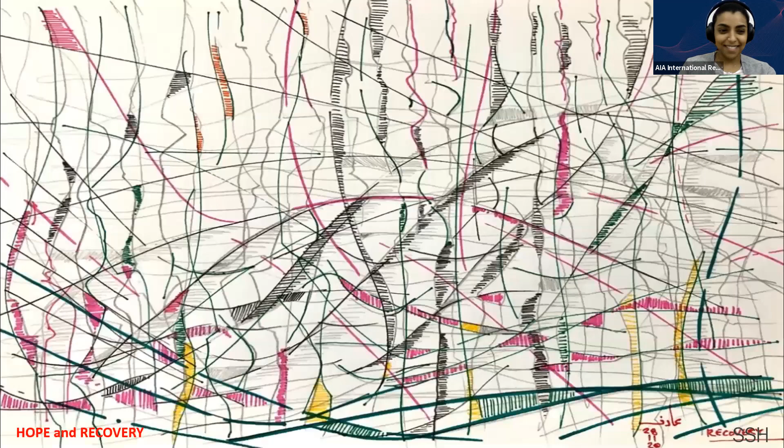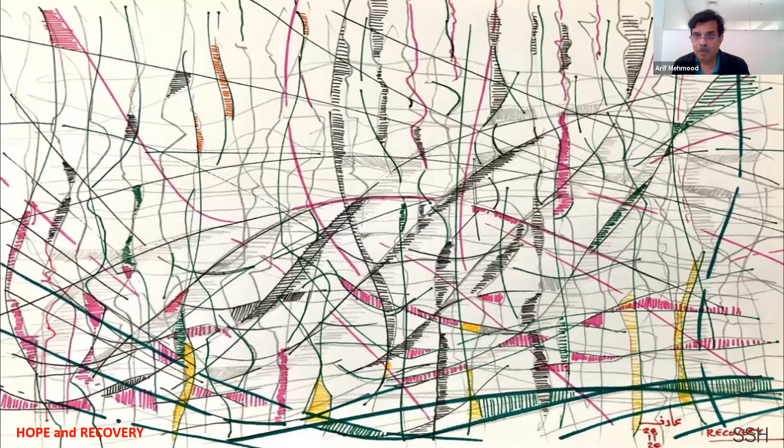It is very difficult to be able to spend time in the evening away from your families, and of course in this pandemic that we're in, there are all sorts of emotions that we're having to deal with. Just for a few words on this picture in front of you - this was done late November. As expatriates, as you know, we live very unusual lives, spread across different parts of the world. Work is one place, family another, and friends somewhere else. So this diagram was at the end of a fairly difficult period back in the UK when the pandemic was at its highest, and thankfully, around about the November time, the figures began to improve.

There was hope and recovery, so there's an element of jubilation and color in this diagram, but still a lot of dark lines everywhere. But that's the life we live as expatriates.

And to some extent, it's a responsibility we must carry because somebody has to stitch the world to keep it global. So this talk today is about how ideas get carried globally. AIA is a fantastic vehicle for that, as is the RIBA. And along with our colleagues in the aviation industry, the education sector, and the construction sector, these are the elements that help us to stitch the world together across different countries and nations, etc. So those are the few words about this diagram.

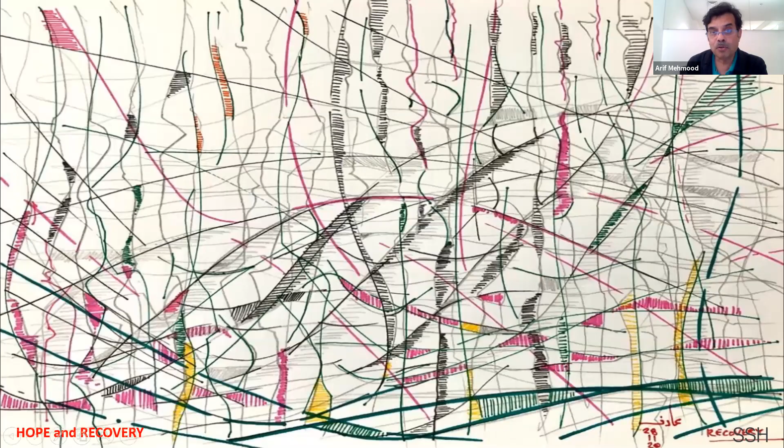And the talk was about the collaboration of all that you need to have in order to perform architecture. And without engineering, you cannot really do architecture, because some of the more technical issues need to be solved by specialists, and engineers are by nature specialists. So it's about collaboration. And when I chose the title, 40 years seemed quite reasonable, where some of the big changes were happening.

And I felt that perhaps the articulation of structure, the ideas to do with sustainability and environmental engineering and fire engineering, these were impacting the way we were designing as architects. So I thought perhaps we go back about 40 years and pick up these threads and see how they influence the architecture that we produced.

And when this was happening in my own mind, trying to put together this talk, I realized that my own career is about the same period, 40 years. So in some ways, a lot of the work I'm putting forward today is a timeline of my own projects, and the collaborations I've had with some fantastic people along the line, and some of the issues we have to solve, which I'm hoping will be of interest to some of the younger people today. And I'm hoping there will be somebody in there who is my peer group, so the talk won't be too irrelevant in that respect.

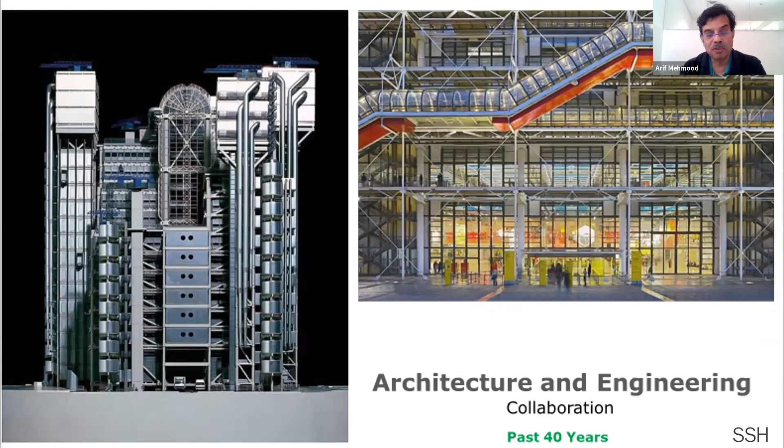So today, what I thought I'd do is pick up on 5 themes that I will take through some of the projects that began in my early career to where I am right now. You will see from the diagrams that I showed earlier there is an incredible amount of expression of the structure. Our structural engineering profession was moving towards grasping what it needs to do, and in fact turning into kind of sculpture. You can see the full control of the engineering of structure. Together with that, the service engineering was also being developed, and it's almost becoming quite poetic in some of the early projects, and we'll be looking at that as well.

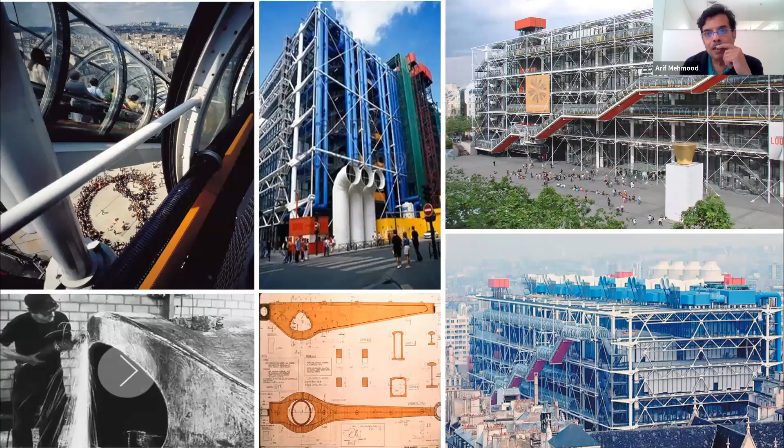So moving forward, this project is a good way of sharing with all of the discipline leads that we now have to deal with: the structure, MEP, facade engineering - all of those issues are prevalent in this one project. And if you look at the back of it, you can see that it is truly a collaborative solution where the mechanical engineering, the structural engineering, and the architecture is supporting each other to come to a solution. A failure in any one of those would be a failure for the entire project.

And I think this is a point where we know that we have to design as equals. We cannot go back, as it were, 20 years before this, where the architect would do a plan and the structure would then drop in his structure, and the mechanical electrical engineer would then drop his engineering within that, and the builder would simply build it.

This is a truly collaborative process, and the process of deciding - well, okay, let's allocate one facade for the entire engineering facade, which went to the back. The front of the facade had the movement of the circulation of the people. It also became a square which represented the movement.

The picture to the top left is a picture that won the award for the photographic picture of the year. It was actually taken by an architect or an architectural photographer. It represents a very popular square in Paris, and you can see the formation of the circular pattern. The performers are performing, the public is watching the performers, and the building is watching the performance itself. It's a beautiful picture that won the prize.

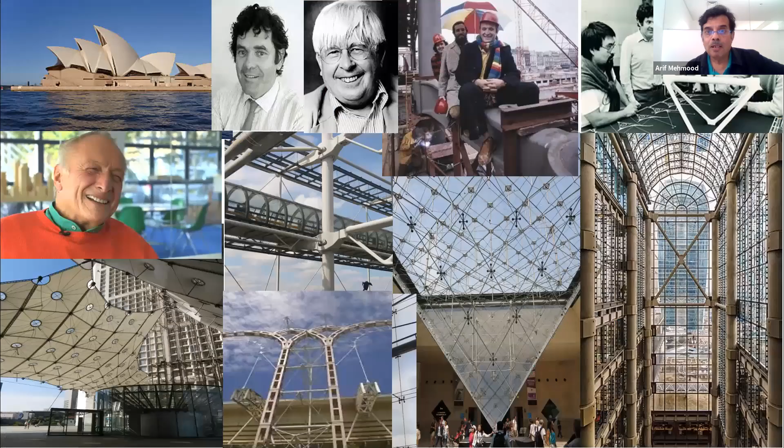And this was designed by Peter Rice, and I think Ted Happold was also involved. So these were some of the most important engineers in British history. The next slide is showing you all these fantastic people who were generating these projects, who were taking my generation of architects to a new level. We were dreaming these projects, looking at the works of these people.

You've got Jørn Utzon's Sydney Opera House. Next to that is Peter Rice, who was the site engineer for the same project. He went on to do the engineering for the Pompidou Center. Ted Happold, who was also in the Pompidou Center, went on to establish Buro Happold, which we've been working with for several projects, and still continue to work with them here in Dubai. And that lovely picture with Richard and his team sitting on the structure of the Pompidou Center. To the right, Renzo Piano was his collaborator for the Pompidou Center.

So these images are just collaged together, where the glass industry was moving to a new level. The structural engineering was moving to a new level.

Bottom from the second to the left is an archway designed by Peter Rice for a project in Spain, which utilizes machined granite with stainless steel tubes to hold it together. It was a fun time for engineering in those early 80s.

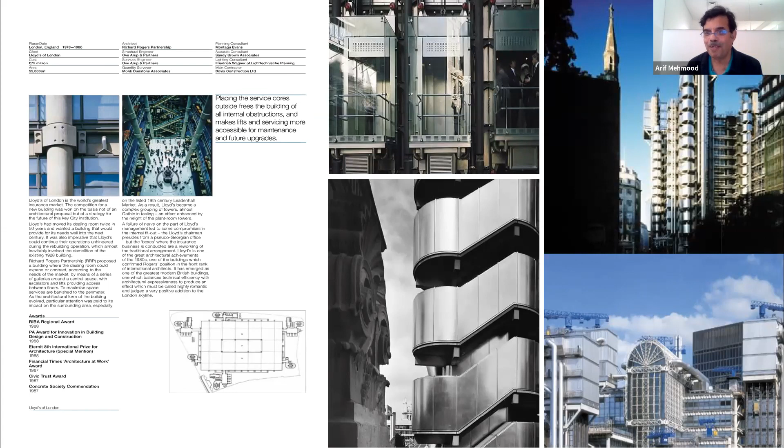At the last leg of this particular project, Tadao Ando was visiting England at the time and wanted to see Lloyd's of London. I happened to take him around this building, spent a day with him just showing him around the project. He couldn't speak a word of English, and to be honest, it didn't really make any difference - the building kind of spoke for itself. He left an open invitation for me to come and see him in Tokyo, and he'd give me a day back, but I haven't actually managed to get to Tokyo yet. Inshallah, one day I will do that.

Just wanted to show you this beautiful painting. It's by an artist called Ben Johnson. The reason I'm showing this is that this is another wonderful project by Richard Rogers, Inmos. It was for the microchip factory. A microchip in those days was a big thing, and factories had to be very, very special.

This building has a structure where the roof doesn't touch the floor. Vibrations weren't allowed in order to be able to make the microchip - the building had to be vibration proof, and there was the issue that if airplanes were flying over this building, the vibration would impact the fabrication of the microchip. So this building is a very special piece of engineering in its own right, but more importantly, this work by Ben Johnson glorified what the architecture was doing and the collaboration with the engineering. This is a photorealistic painting of the architecture and the engineering that goes to make the architecture, and Ben Johnson was doing these wonderful paintings.

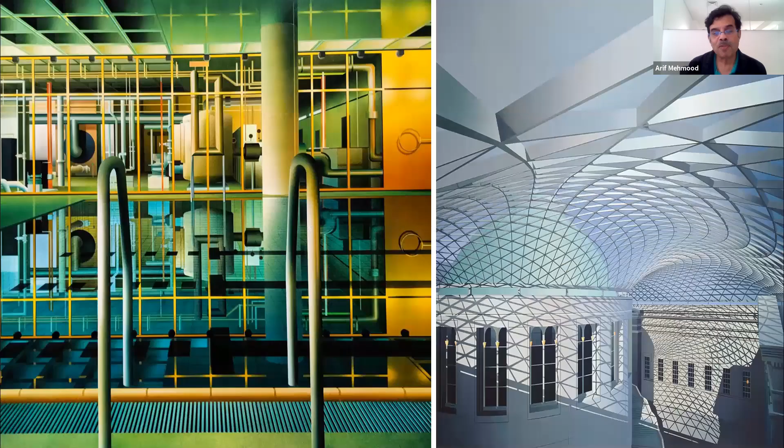On the left is Willis Faber. He is actually drawing the swimming pool and the plant that services that pool and the rest of the building. The picture on your right is the wonderful British Museum extension by Norman Foster, and again Ben Johnson is doing his magic in doing the painting of photorealistic architecture.

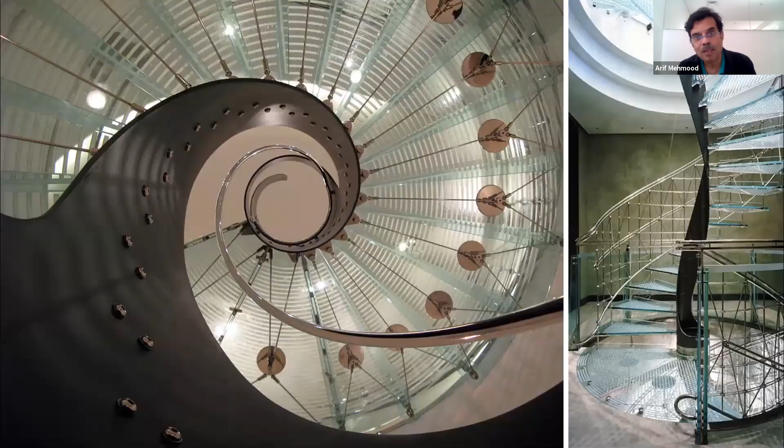Just moving on, at the time Lloyds was being done, Eva Jiricna was becoming quite prominent as an architect. She started her career with Richard Rogers and went on to develop her own career, and she became the queen of staircases. This is just an absolute piece of magic of a staircase, where the glass technology is brought to the forefront, and the structural engineers are getting involved in trying to understand what's happening to the glass, how the forces can be resisted, how the metals and the balustrades and all these little machined components hold together these little bits of cage, if you like.

It's just another refinement that's happening in the industry. And as a young architect, it's becoming a beautiful time to work in. You'd want to get up in the morning and say to the client, 'Oh, let's have another one of these staircases.' And we were doing this. It was absolutely fascinating.

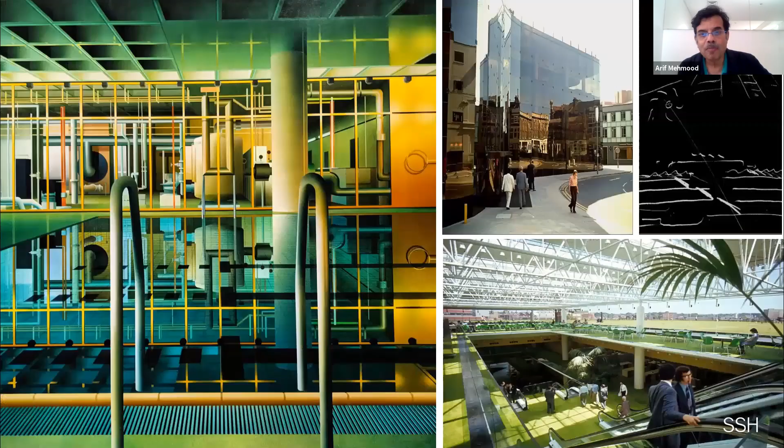So this is just before I am actually becoming an architect who has to start engaging with the real world and doing real work, and this was the template of work just before me. Again, Ben Johnson doing the painting of the building we're just looking at, the little sketch of Norman Foster showing how he sees the mobility of people through the building, and the picture at the bottom actually showing the sketch next to the reality of what actually happened. It's an absolutely wonderful project.

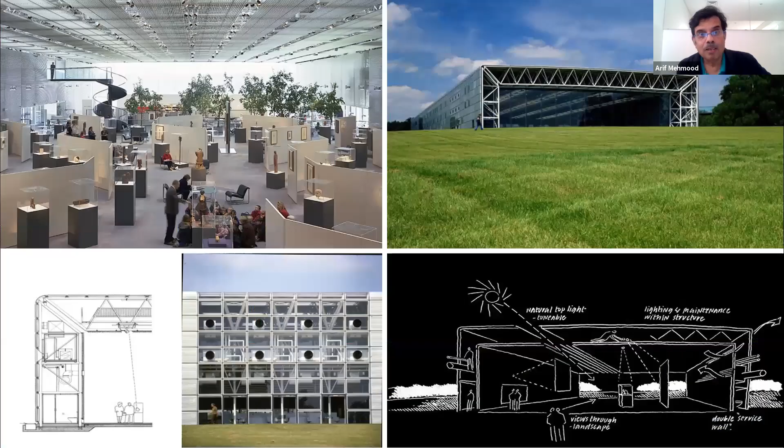Another one of my favorites, again, the Norman Foster building, Sainsbury Centre, East Anglia University. Here, the structure, the engineering coming together. The reason I'm showing this is that the picture I'm going to show next has some bearing on this.

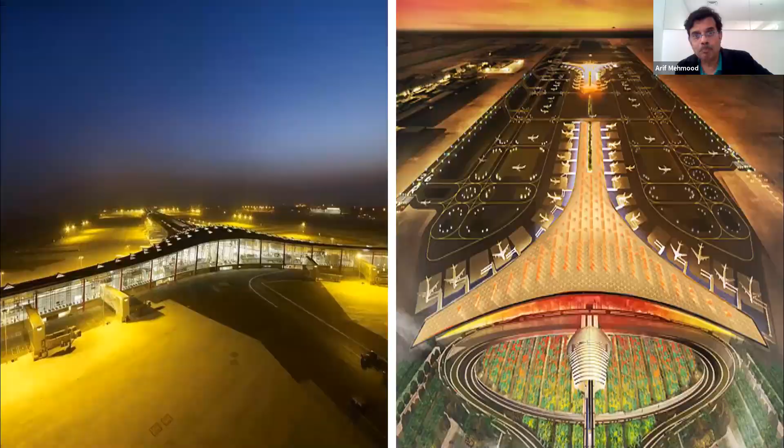The airport, Beijing. I visited this place about 10 years ago, literally a year after it was finished. It's a project that needed to be done in 3 years, very, very quickly. As an architect, if you have to sit down with a client and say, look, I need a building this size and I've got only 3 years to do it, can we do it?

On a project like that, you really need to be starting to sketch, but also need to mobilize at the same time. You need to get the diggers on site to make sure this project is delivered. So some of the ideas you're going to see in these beautiful photographs are not new. These ideas have been well tried and tested from some of the buildings I just showed you. The ceilings, the structure behind the ceiling that carries all the mechanical, electrical elements, brings in the daylight.

The columns in this particular case are point loads for a space frame structure to simply sit in to provide the cover you need. So as a designer, you can say, look, I can separate this project into 3 components. I can do the basement, I can do the element in between, and I can do the structure. I can get these 3 teams working side by side, and the contractors can be fed information literally on a daily basis, doing what they need to do.

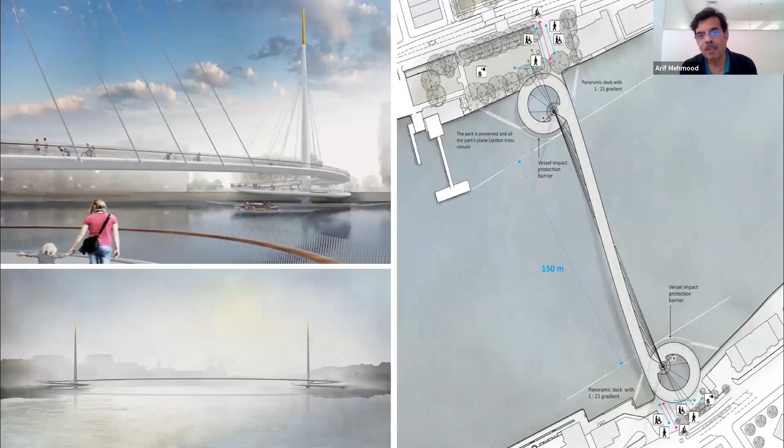Here's an absolutely mesmerizing project by a colleague, an ex-colleague of mine from Hopkins. This is a pure understanding - it's a footbridge and a cycle bridge. Robin Snell was a colleague of mine, we worked together at Hopkins, and he won this international competition.

The top left is simply a mesmerizing image of the geometry of the helix of the cycle track, and the staircases in between that allow the pedestrian to walk through. When the competition was put together, it was quite obvious there was only one winner. Sometimes in life these things happen - this magical solution simply comes along and solves the problem so beautifully. It's absolutely mesmerizing to see how a very simple idea simply solves all the issues and actually looks majestic on the Thames.

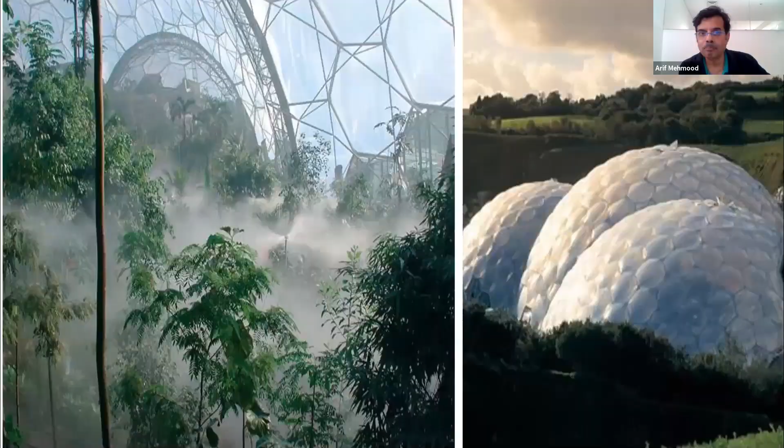Another one of our cousins in the business, Grimshaws - this project is in the west of England, Cornwall. An absolutely beautiful rendition of a structure, kind of a geodesic dome. The structure is lost in these hexagons that have air-filled fabric elements that allow you to temper the temperature. It's one of those projects that, like the previous project by Robin, was brought together so beautifully. If anybody wants to appreciate lightness of structure, just go and visit this project in Eden, Cornwall - the scale is absolutely mesmerizing. It's poetic to see the scale of a man trying to get access to the roof of this building.

Okay, some real buildings now - back to my own career, back to Richard Rogers. At the time the Lloyd's building was finishing, I joined the practice to help put together this project: Billingsgate Market, which was in the City of London. They used to sell fish there. The basement was essentially refrigerators where the fish was kept. The city was booming, the fish industry had to move out, and this building became empty.

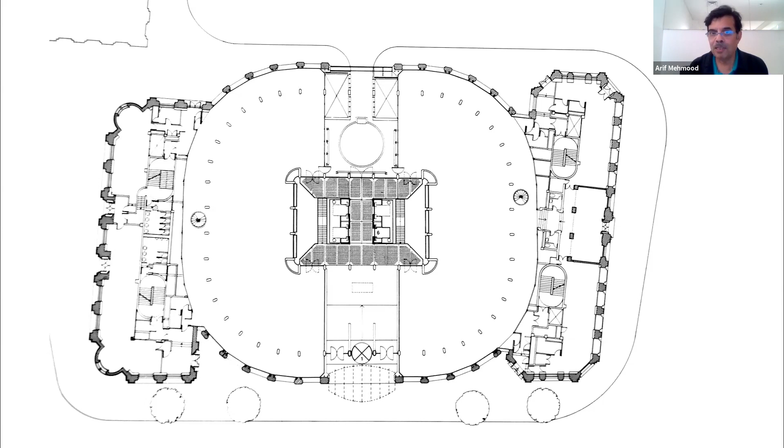Hopkins came along and planted the element in between, allowing all the supporting elements - the staircases, the lifts, and all the servicing elements - to the right, with the core in the middle, which allowed the atrium space to be carved out.

What actually allowed the project to be won was the fact that it already had an existing basement, so the foundation was there. But because the building was close to St Paul's, the heights were absolutely limited—there was nowhere to go, not even a millimeter. The team realized that to win this project, they needed to provide an extra floor to beat the competition, telling the client: we'll get you the extra square meterage at no extra cost.

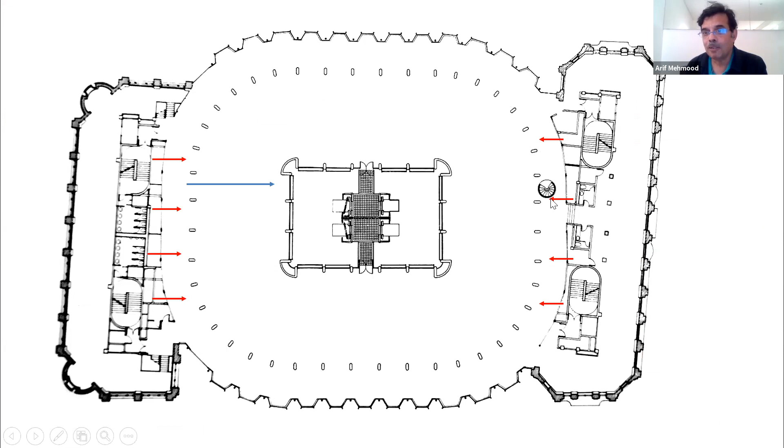And that's what happened. What you see on the diagram—the red elements are your primary structure, which reduces in depth as it moves to the perimeter. That allows the blue elements, your primary circulation of services. This solution is a pure collaboration of engineering and architects coming together, forming a solution where you have a race course of primary circulation of services going to the risers, and the middle bit allows for primary structure. In return, we were able to add an extra floor to the project, which made it commercially viable for the owner to commission Hopkins—a fantastic way of going forward.

Back to Margaret Law, she was developing the fire engineering at the time. At the point this project was won, it was very difficult to do an atrium space that wasn't hermetically sealed. With the fire engineering, we were able to work out the risks and convince local authorities that we wanted atrium spaces with openable doors, almost like an Italianate village character. Being a headquarters building, you could literally open the sliding doors and have a different, more homely, domestic character to the building.

This was only feasible by working with the fire engineering being developed at the time with Arups. The image on the right shows the proximity of the new glass facade to the old fabric of the City of London. There was a rule that you could only have so much glazing adjacent to an existing building. Again, with the help of fire engineering, we were able to allow the glass facade to exist by providing systems within the building to mitigate any risk of fire spreading to adjacent buildings.

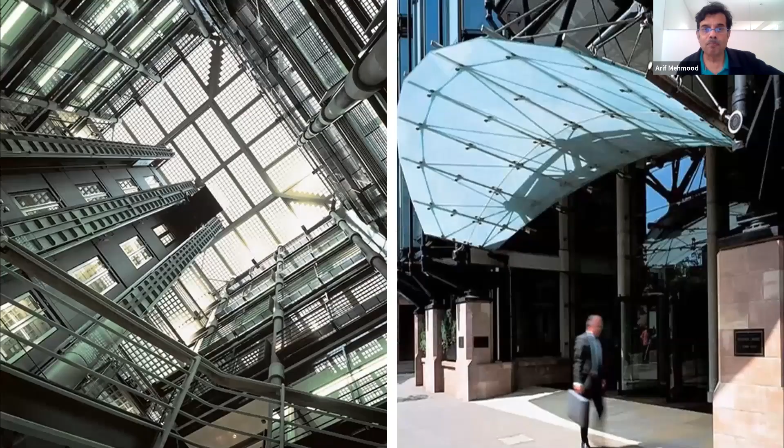An image of the inside: glass block roof with the lift shafts opening up the volume of the elements within the atrium, bringing in daylight. Fiber optic technology was coming to the fore at the time, so that was employed in this entrance canopy.

Moving on to the next project—it doesn't seem very exciting, but projects like that are really good for the soul. At the time Bracken House was coming to an end, I was asked to lead this project: the renovation of this gallery at the Victoria and Albert Museum. This gallery is hugely important to the museum, but I think hugely important to humanity in some respects. It has cartoons by Raphael, a very important artist, as we know. These paintings are unique, owned by the Queen, and are very important places of, how should I put it, pilgrimage for Christians.

This gallery wasn't just an exercise in architecture, restoring the gallery to its original design, but also an exercise to create an ecclesiastical space for contemplation for the pilgrims. The original brief from the curators was that these paintings are priceless—they wanted a gallery that would preserve them in case of any risk to the rest of the museum.

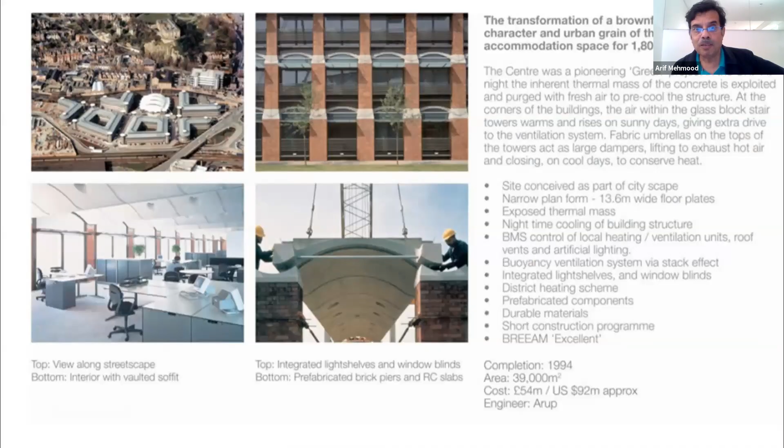I'm just going to skip this project where we were trying out prefabrication and natural ventilation strategies that went on to be used for our future projects. Here you can see some prefabrication happening at the Inland Revenue Building, a project led by my good friend Bill Taylor. This is the strategy for natural ventilation of the building.

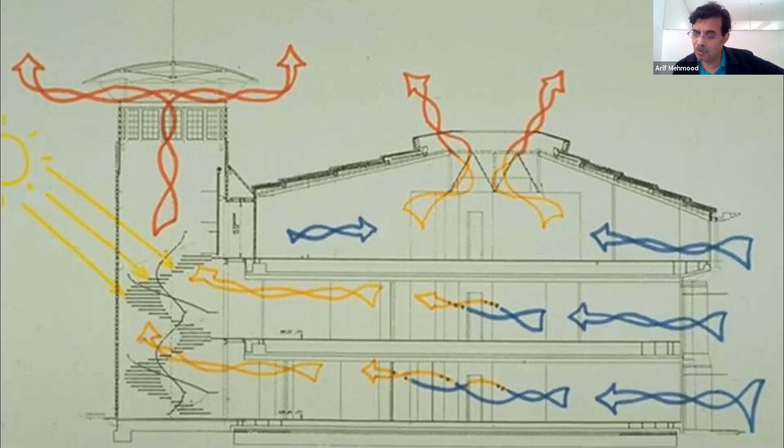We were becoming concerned with how buildings were using energy, etc., and trying to design strategies that minimize the use of energy, a reduced amount of all the mechanical gear that goes into putting together these buildings.

Again, another beautiful building, a very different kind of fabric. This time it was an opera house where we're using natural materials for structural purposes. There you have precast concrete with timber, utilizing a novel way of producing air conditioning into this space without making a lot of noise, which is very important in an environment like that.

Here we're now using brickwork because the building requires a lot of mass, and how the brickwork is integrated into the structure is an interest that, as Hopkins, we were pursuing at the time.

And this is a project in the Far East. I went away there for a few years myself, and I was asked to do this building for a telecommunications company - it's a tower. Some of the ideas came from Lloyd's of London, but you can see the sunshade on top was a gesture that I felt was a way of articulating this building in a very powerful way.

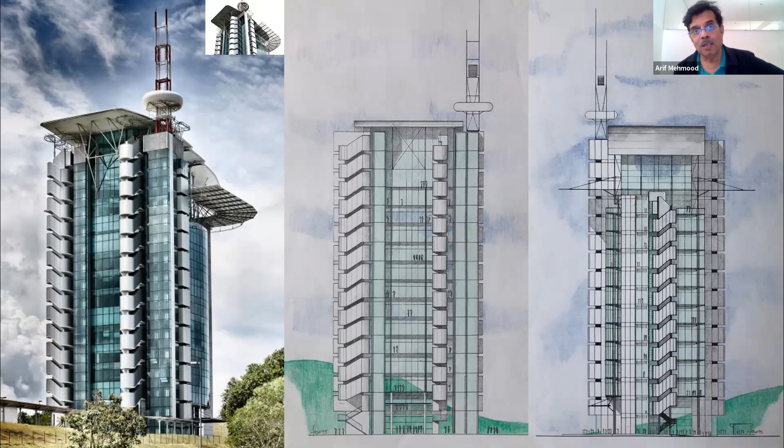So this is probably one of the biggest sunshades on planet Earth. It has a kind of 50% solidity about it, but essentially it cuts the 45-degree angle of the sun. And these are some of the drawings from the time that were done.

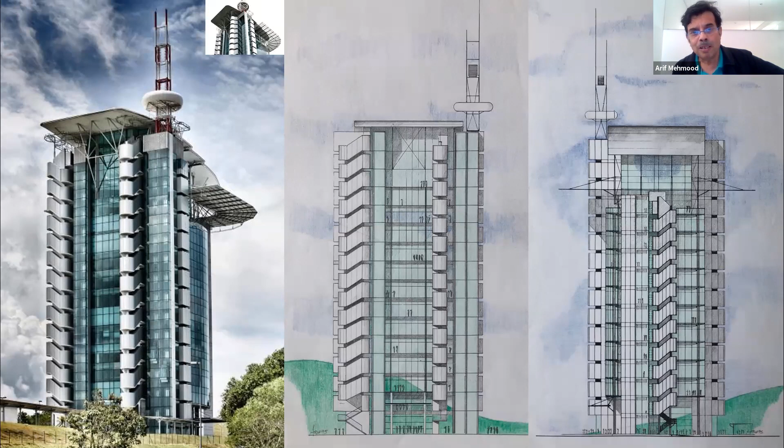So this is kind of a solo project done by myself and my 5 architects who came from the Philippines. Abdul Wahid al-Wakil was doing a building at the time in Brunei. I was his architect doing this building at night, doing this building at daytime - what a contrast, as you say. But he was a fantastic influence to work with.

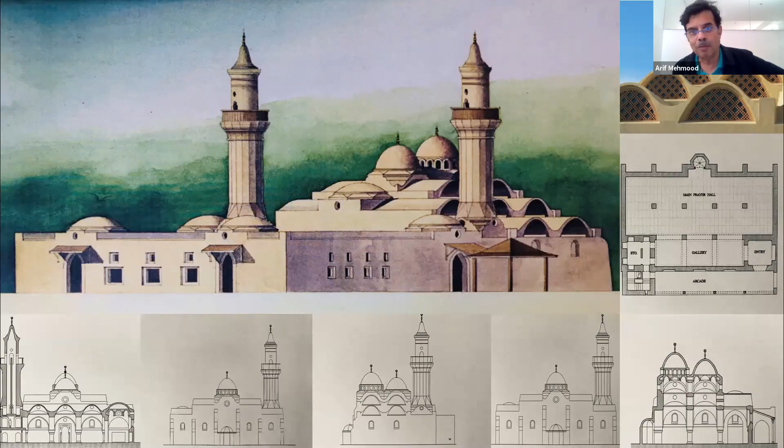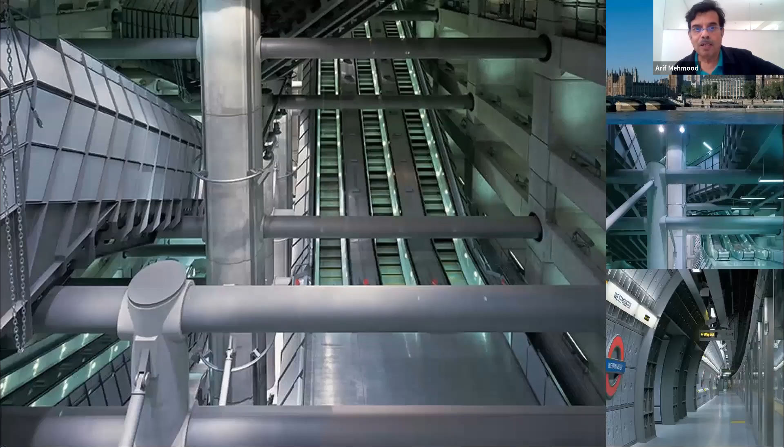This is a beautiful project, the Westminster Underground Station. It's a pure manifestation, again, of the structure that actually creates a beautiful space. The building above that is the Parliamentary building by Hopkins again.

The image on the right shows how there is no need for a suspended ceiling - all the mechanical and electrical is controlled. The facade is designed as a usable artifact. The daylight is controlled, the artificial light is controlled, and at the time this building was produced, it was one of the least energy-intensive buildings in the UK.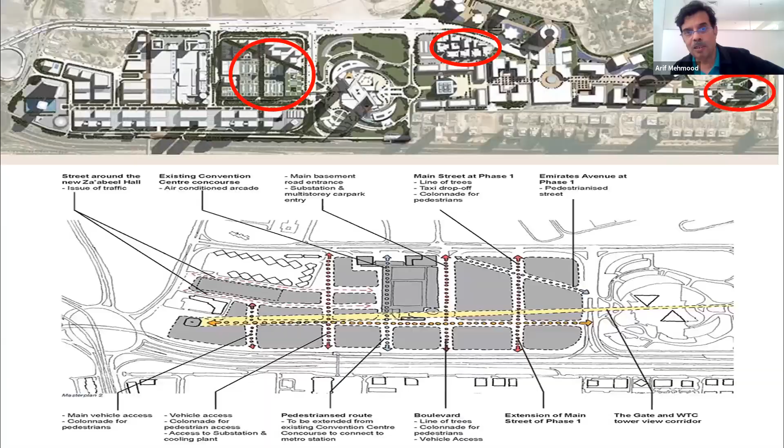Wellcome Trust - I was going to mention this, but I was going to go on to talk about these buildings that Hopkins did in Brunei, as we're beginning to play with the self-shading elements of the local climate. And we were also having a lot of fun with Buro Happold in Dubai, doing this fantastic exhibition center, again designed by my good friend Jonathan.

And again, the project didn't go ahead. One of the first towers that Hopkins did, this was realized pretty much as you see, without the spire on the top, but it got built.

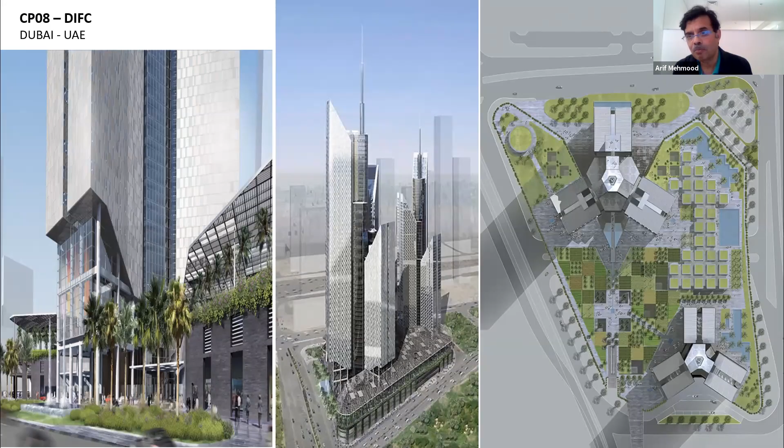The old Dubai, the old India, or old parts of Delhi, old parts of Lahore, are all these places of my own experience that can be brought to expression here.

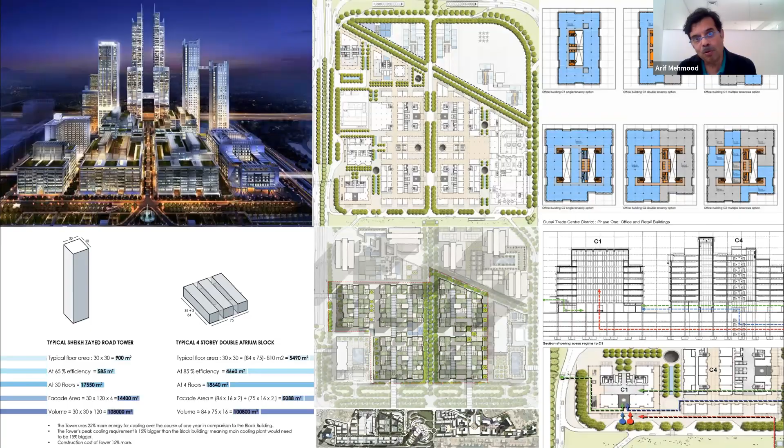And then very quickly, we're just going to move on to this project here. This is one of the last projects we did as RMJM with Calatrava. And again, this structure, the facade, all had to be retested, and it was a fantastic collaboration with these wonderful engineers we worked with.

And another one of my favorite projects with our friends from France - Buro Happold did all the engineering, some beautiful, fantastic engineering on the inside, beautiful craftsmanship over the internal spaces, and the scale of this is absolutely fantastic.

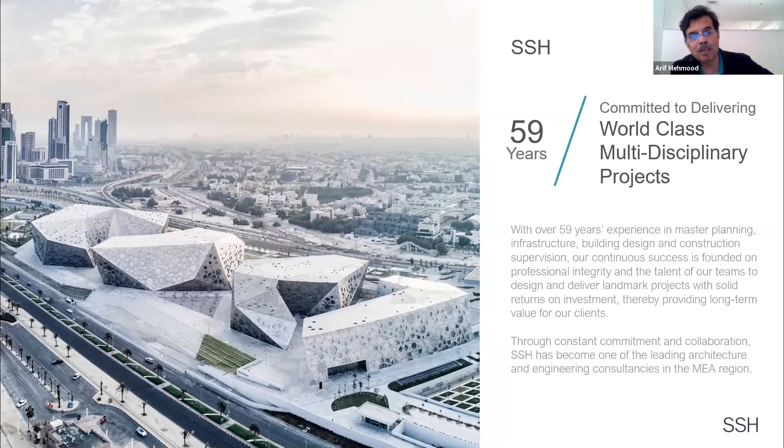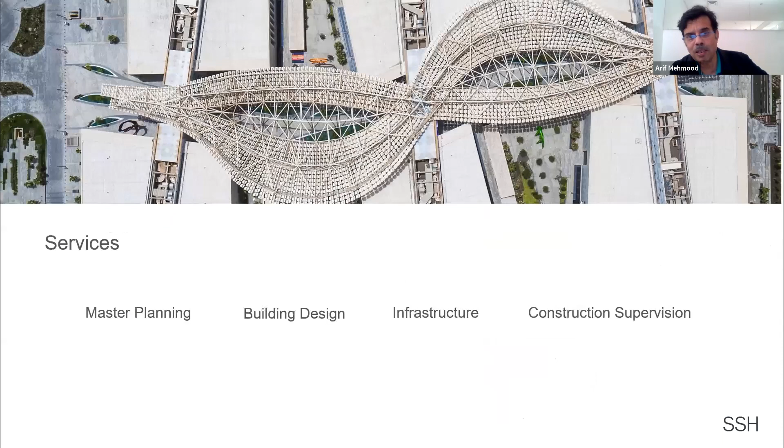On to some of the work of my current company. This is some of the projects in Kuwait. Another beautiful project of SSH in Kuwait, and some of the work that we've been doing in Oman itself. This is a wonderful project that has a beautiful shading to mask the sort of control of the project, and again, a shape that responds to the climate.

And I think there we are. Thank you. Keep safe. Mariam, how am I doing?

Fantastically, thank you again, and apologies for interrupting you. It seems that a lot of people have a lot of interesting questions, and I wanted to make sure that all of them are answered, especially for the participants, because I'm sure a lot of the answers will be very, very incisive and interesting.

So I'll kickstart the Q&A. We have one of our first questions: would the climate crisis have increased the collaboration between architects and engineers? Yes.

How so? I'm just going back to the Pompidou Center. There's something that happened - the Apollo program was just one of those magical moments where it brought the entire globe together. The television, the idea that man was going somewhere, and the filtration of the technologies that NASA produced to the world of architecture allowed every facet of the contributors building environment to start becoming proud of what they were doing. Pompidou Center was the first project where every collaborator of the building trade was able to say, look, we did this together, without which we can't move forward. How we solve the global issues is implicit in how Pompidou came together, and I think that's how we're working as we go forward.